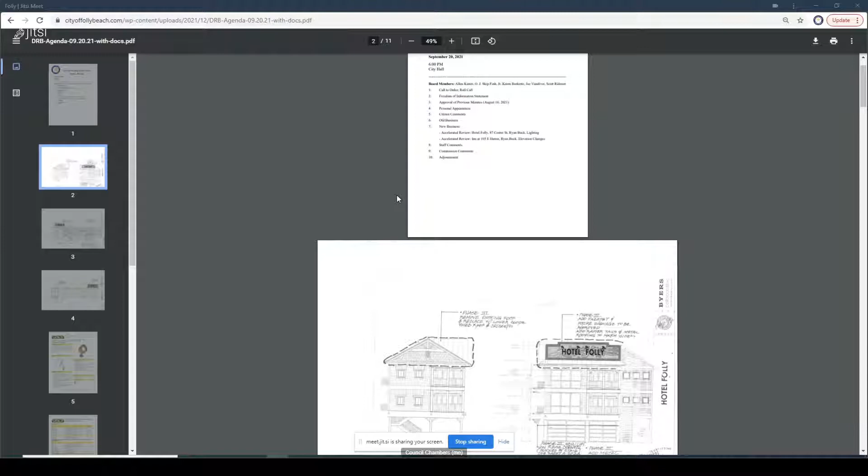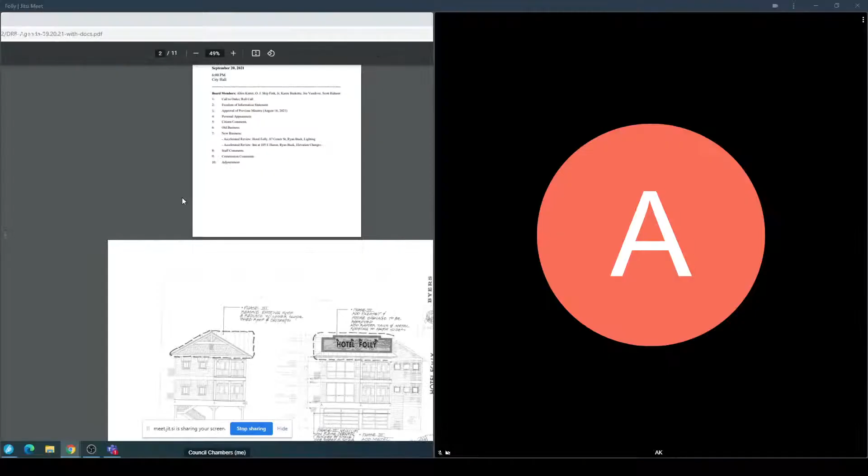Let me ask Catherine, I'll see if she's got some more. Yes, she is. Hello, Scott. Hello. Okay, let's see if that works. Catherine, we have an extra agenda. Thank you. Hey, that's Scott. Good to see you, man. Good to hear. Okay, we are up and don't have to wear masks. He's been out there for months, if you don't want to.

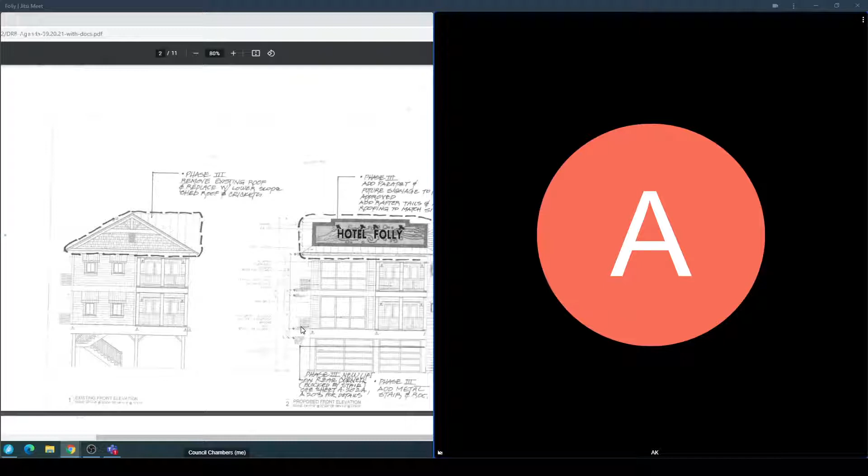Okay, Katie, personal appearances? So we have Sandy Byers with us today for 87 Center Street. And when we get to new business, he will describe that wall and side door. And then we have Mr. Alan Campbell with us representing the duplex project at 220 West Arch. Thank you, welcome gentlemen. Thank you. And any particular citizen comments submitted in writing or anything prior to the meeting?

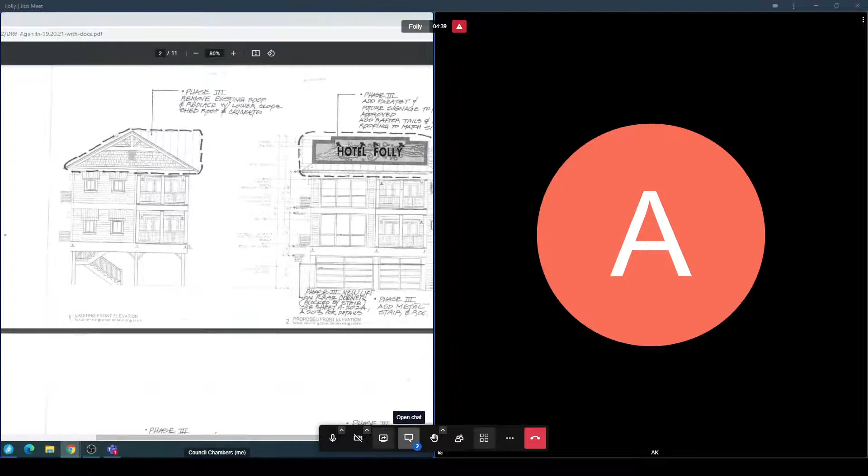Nope. Okay, any old business? Nope. All right, moving to new business. Looking for an accelerated review on 87 Center Street. Sandy Byers is representing Ryan Buck, and we're looking at a CMU wall and side door, main door. Can I have a motion to discuss? So moved. Second. All right. I think we've approved that, Katie. All right, Sandy, you want to introduce your thought process here for what you're asking to do?

Katie, do you have this A201 on that? Probably, looks like that's an old one. This one that you dropped. Mr. Campbell, thank you for your patience. We're working through this here. We're fine, I got all night. Whoa.

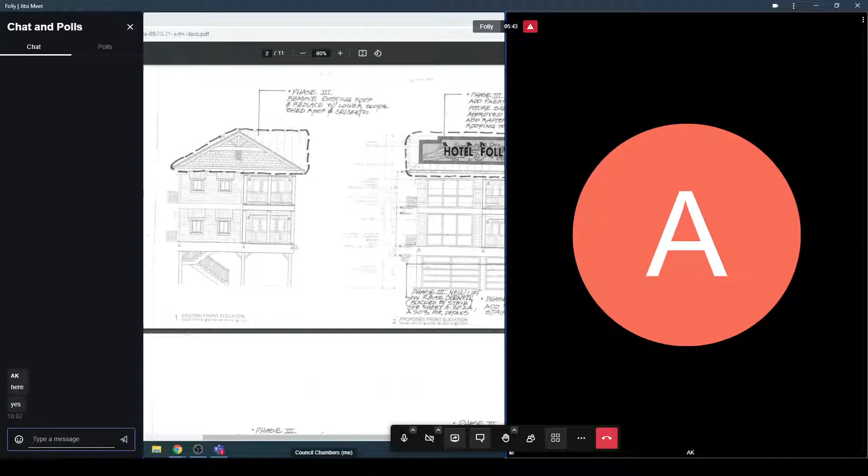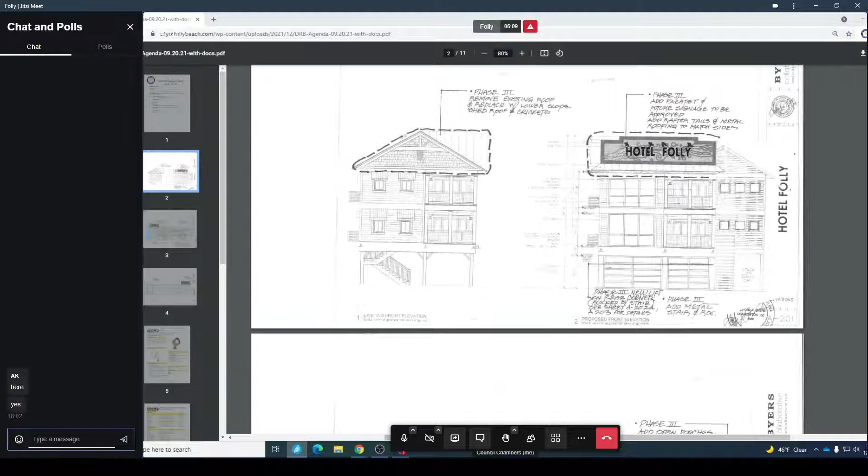We decided in the front, we wanted to add a pedestrian door, which is very important because we have to have an entry on the side here, and people can only enter through that and come into the outside dining area. So that's why we needed to have a door here. We had a larger overhead door there, and we had one here. They're both free down, right. So we've added this door, and these piers are a little bit wider than they were before, and these doors are a little more similar in size, which I think looks better. And then we're lining up the mullions there. So I think this is an improvement over what we were showing. Now, this is before. Eric's cool with all this with the door here.

So I talked to Eric about that, and it could also be interpreted as an egress requirement—if those doors aren't open, we need to be able to get out. So those are going to be like fire doors, or what kind of door is it? They are push doors with clear glass, but it has to be a special glass that will withstand the flood pressures for all of the fenestration on that ground floor.

And that enters into an outdoor dining room. This indicates a 3-foot wall that comes across the front and returns down. Let me get to the site plan so you can look at that.

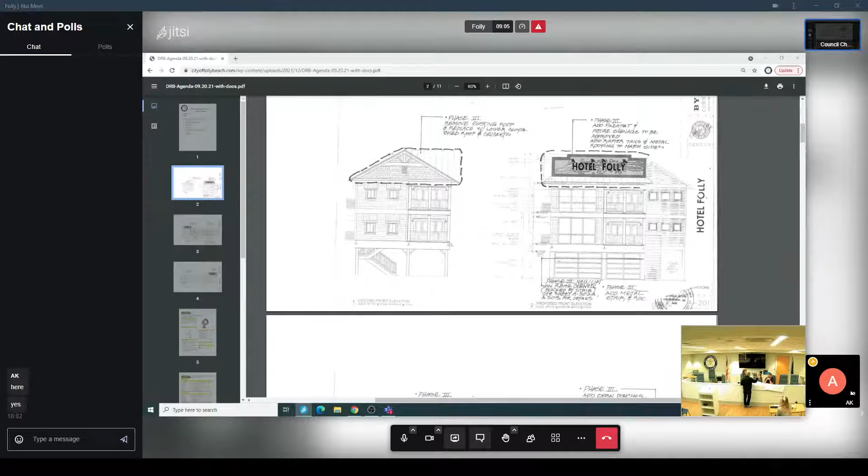And we've got a detail, let me show you. The intent of these two larger doors here is to make it sort of an open space when it's nice out. We want this to read as one space, so when people are driving by, they look in and see all the way into the restaurant.

I think it would be lit, but this isn't a big change. No, it's really not. We're trying to meet that zoning requirement of having to go into the restaurant.

So that is a requirement for your accessory—to go inside the restaurant before you can sit. You can't come in from the outside. Okay, gotcha—that's a zoning requirement.

This is a detail showing that banquette. Here's a section, cut down the side. It says 3 feet again, and then there'll be a seat. And we've got openings so water can flow through, or we can blow trash or leaves out through those holes.

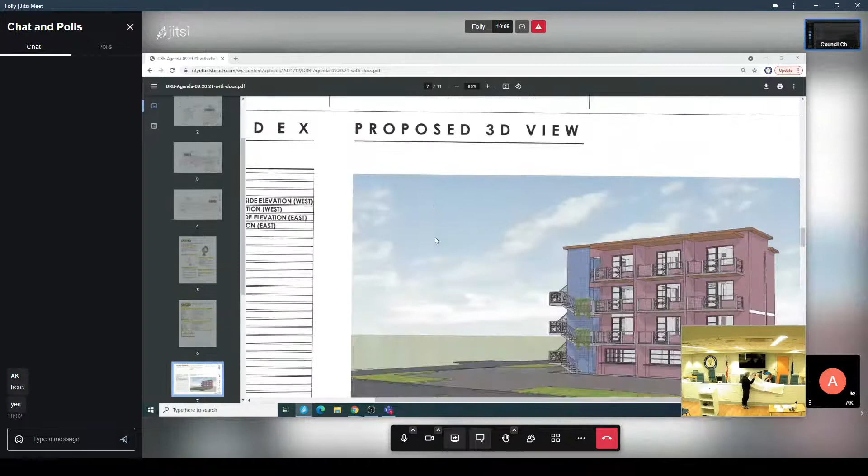So what is your overhead structure? There is no overhead on the outside—no trellis work, no overhead fans, nothing, it's just open. At this point we may want to come back and add something later, but for now we're just thinking umbrellas—tables and umbrellas.

So those are the things we're really asking for tonight. Is there anything else you want to add? I don't think so—Katie had anything else she wanted to mention.

Katie, we just needed to cover the courtyard and the facade—was there anything else? Changes on the front entry, just the wall. Ryan did want to let everyone know this will become a green wall with some big ivy on it as well, so it won't be concrete forever—it'll actually be like a living wall.

We're going to try to do that here too, like at the stairs, some kind of wire. This is not open air. That part is. Yes, okay, so I understand all that.

Where was the wall—this is the previous garage that was all covered before? That's here, okay, so you took the garage doors that were here and they're down. Oh, new door—this will all be walled in, but not roofed.

We did talk to them—they might put some sort of sunshade or covering at the top here, but it would be temporary. And there are some overhead doors here that we've already had approved, so you can have some walk-up service.

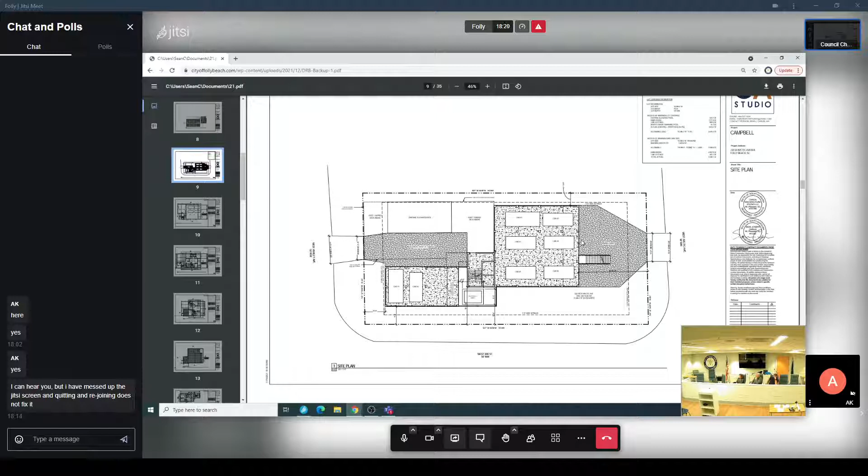Right, so I'm going to scroll to the elevations. My mouse is having some technical difficulties, but I'm going to scroll and look at the elevations. He also has color samples.

That's really what you guys are concerned about, yeah. This site plan shows the orientation of what everything looks like. Okay.

And it meets all the zoning requirements. We tried to come up with something that wasn't too contemporary — more tasteful, to kind of blend in with the architecture.

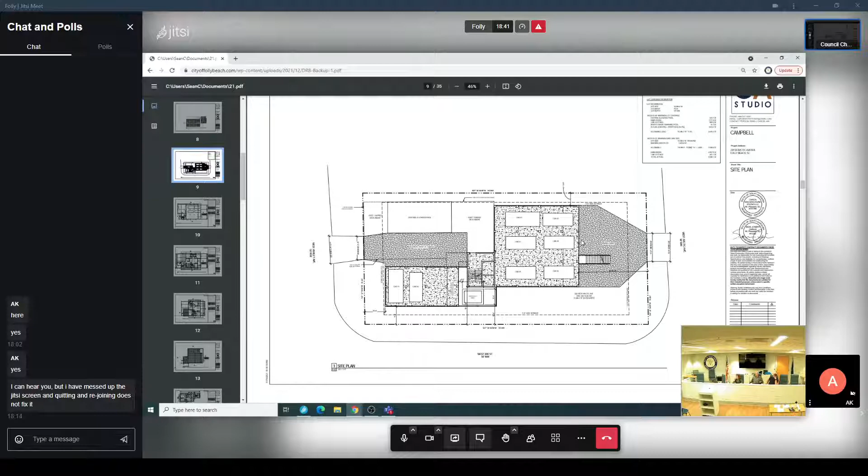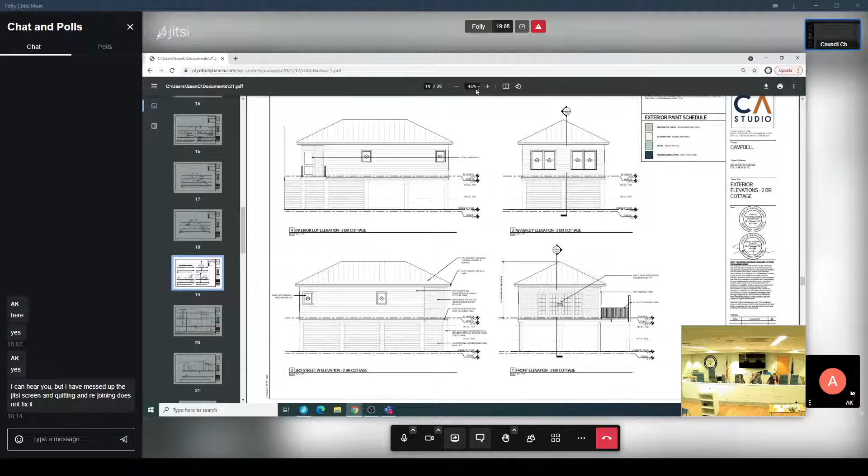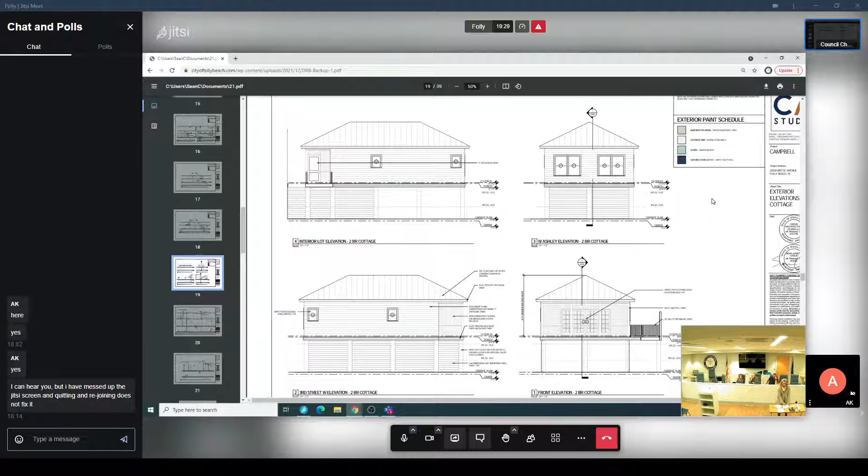Okay, now will the cottage have access to the pool as well? The pool will stay elevated, and we'll probably have to build a beam around it to raise it a foot, to match the finished floor elevation of the new structure. So the concept is to allow the main house to access the pool, while the two-bedroom cottage probably will not, unless we work something out. Right now, the primary access will only be from the main house to the pool, not both structures concurrently.

But that pool's been existing, correct? Yeah, the location stays the same. Yeah, I think my husband and some friends were renting it once — someone stepped backwards into it one time.

A chat question popped up, I think. Well, I can't read what it says, but I can read the question. You can quit and rejoin. Oh, sorry about that. He says he can hear us, but he's just going to stop the screen. That's fine — if he goes away, we'll come back.

Okay, so these are the plans that he submitted, so you can see that perspective view there. And then let me get to these architectural drawings that show some elevations here. Love when I do that. So pretty simple architecture there, from West Ashley.

And we actually planned to renovate the existing structure to look exactly like that, so we decided we'll just go ahead and design the new structure to look like how the renovated structure was going to appear. So that's the elevation.

Here, pretty standard, and then we get into wall sections. He does have colors picked out for you guys. You know, Alan is our architect — sort of a builder-architect.

I'd be curious what questions he may or may not have about any of this exterior appearance and materials.

I'm not familiar with what kind of exterior materials you're using. Are you using vinyl, or what is it? Are you familiar with the term Hardie plank? We usually use a combination like Hardie plank lap siding, and then board and batten, but all cementitious, decay resistant materials.

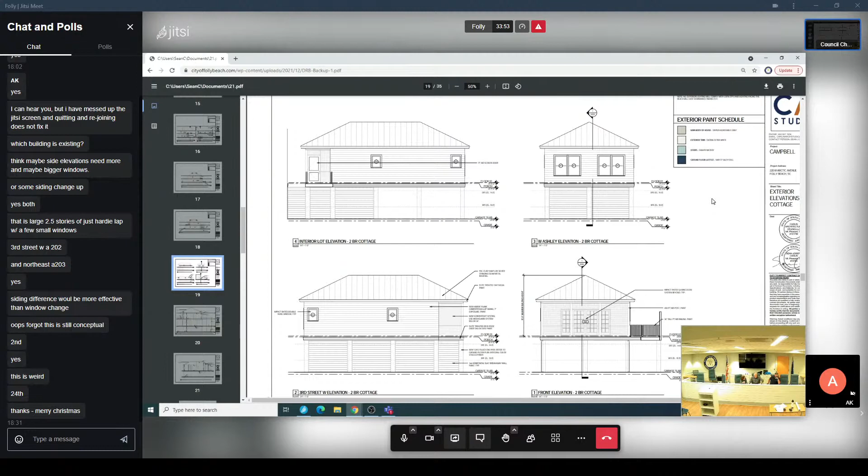I may not be back in January or ever again. Where are you going? I'm going to Ukraine next week, this week.